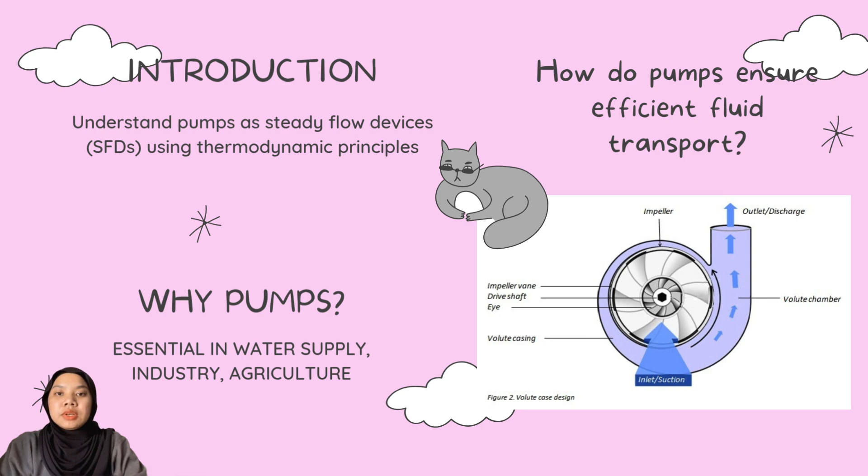Now that we have established the importance of steady flow devices, let us delve deeper into pumps as a vital example of these systems. Pumps operate on thermodynamic principles that enable them to move fluids efficiently, regardless of the conditions they encounter. Their construction is a testament to engineering ingenuity. At the core of their operation is the impeller, a rotating component that transfers energy to the fluid by increasing its velocity. The volute casing, which surrounds the impeller, is designed to guide the fluid effectively toward the pump's outlet

while minimizing energy loss. The drive shaft connects the impeller to the motor, ensuring a seamless transfer of mechanical energy into pressure energy. These components work in harmony to ensure that pumps maintain a steady flow even under varying operating conditions. This reliability makes pumps indispensable in many sectors.

For instance, in municipal water systems, pumps enable clean water to travel over long distances and elevations, reaching homes and businesses. In agriculture, they are critical for irrigation systems, ensuring that crops receive the water they need to thrive. Meanwhile, in industrial settings, pumps transport fluids such as chemicals, oils, and slurries, supporting the production of goods and materials.

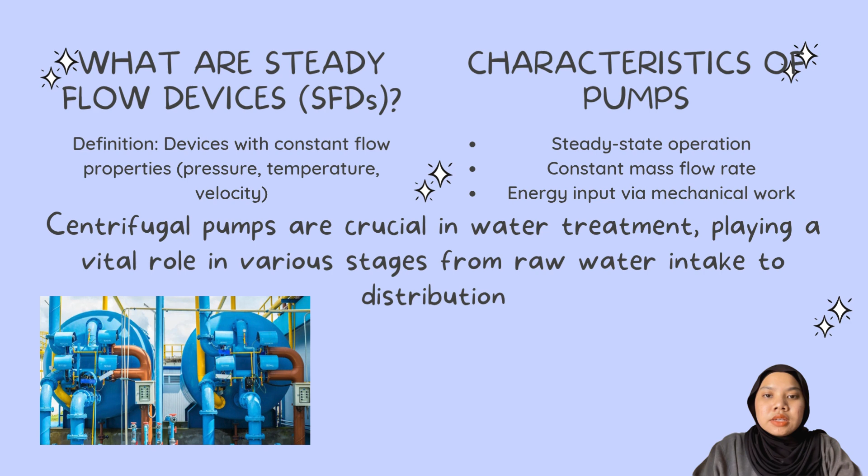Their ability to operate efficiently, adapt to different demands, and provide consistent results underpins their importance in modern infrastructure and industry. Pumps, as an example of a steady flow device, demonstrate how thermodynamic principles can be applied to solve real-world challenges, highlighting the intersection of science, engineering, and everyday life.

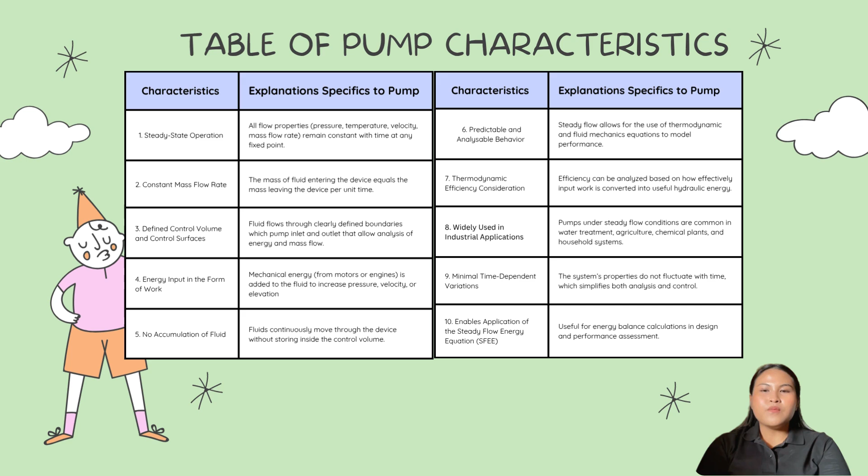Next is the application to pumps, in which mechanical work increases fluid pressure. The pump adds mechanical work to the fluid through the shaft. This increases the fluid pressure and sometimes velocity or height. For the steady flow assumption, the mass flow rate always stays constant and energy is transferred continuously. In steady state, all energy input, the shaft work, goes into changing the fluid's energy, mainly pressure head.

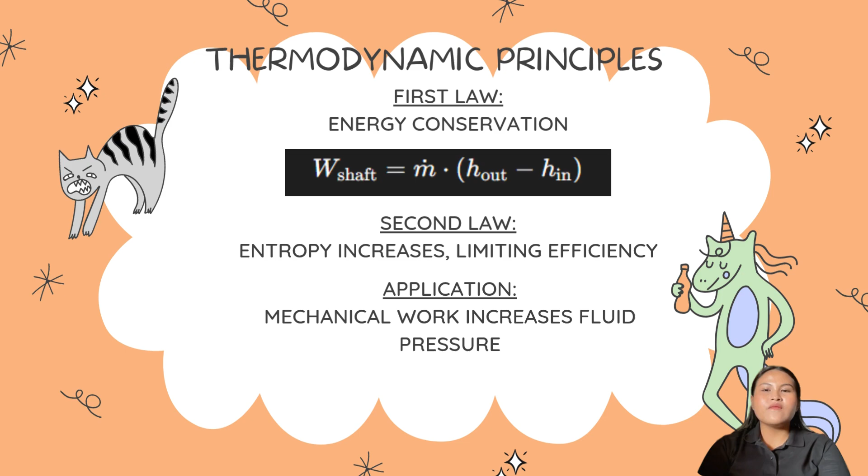So, this is the first law of thermodynamics, energy conservation. This equation is derived from the steady flow energy equation, SFEE. In pumps, shaft work is done on the fluid, increasing its enthalpy. The increase in enthalpy represents an increase in pressure or temperature of the fluid. In a pump, energy is added to the fluid to move it against the pressure. Second is the second law of thermodynamics, entropy consideration, in which entropy increases, limiting efficiency. This shows no real pump is perfectly efficient. Some energy is always lost due to friction, heat, or turbulence. The second law reminds us that perfect energy conversion is impossible. Hence, we calculate isentropic efficiency to evaluate performance. Entropy increase also indicates irreversibilities in the pump system. Next is the application to pumps, in which mechanical work increases fluid pressure. The pump adds mechanical work to the fluid through the shaft. This increases the fluid pressure and sometimes velocity or height. For the steady flow assumption, the mass flow rate always stays constant and energy is transferred continuously. In steady state, all energy input, the shaft work, goes into changing the fluid's energy, mainly pressure head.

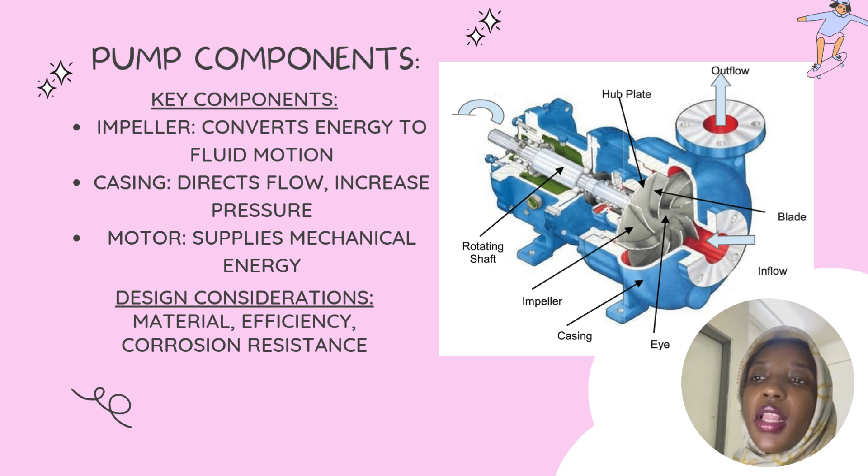About the design considerations for the pump, there are a lot of things we have to take into consideration, but again, most importantly are the material, the efficiency, and the corrosion resistance. So what do we mean by this? We mean that when we select any material to use in the process of design or manufacturing, we have to take into consideration that it should be a corrosion-resistant material and it has a high amount of efficiency.

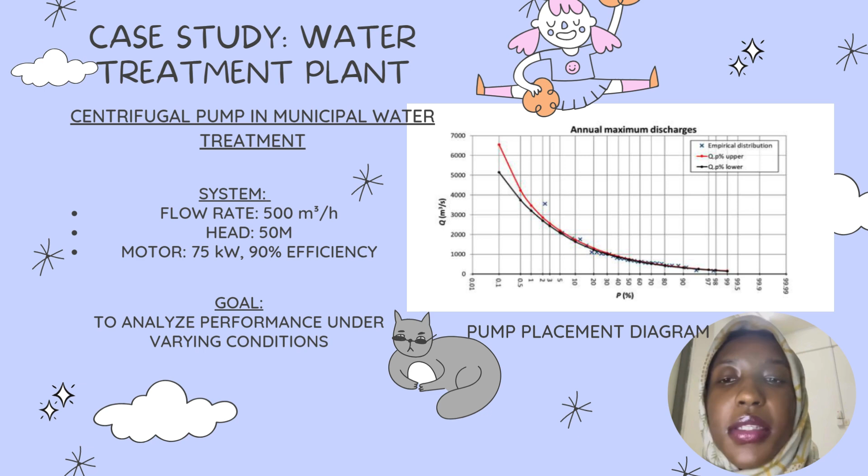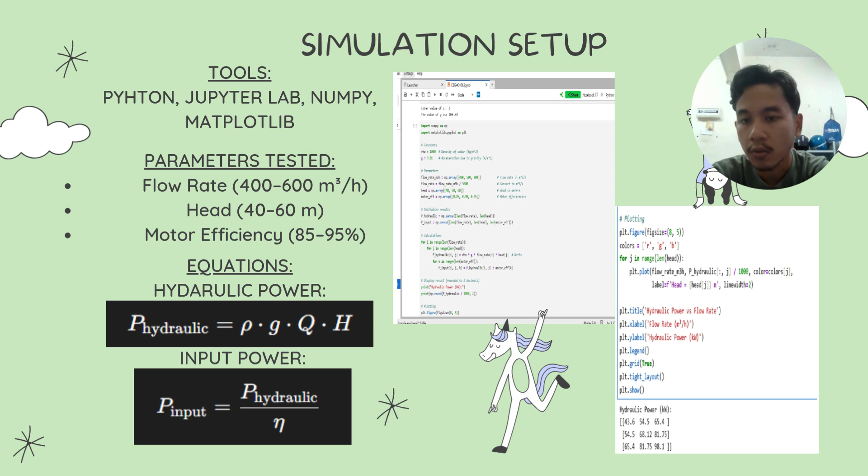So today I will explain to you about the simulation setup. For the simulation setup, there are a couple of software that we use: Python, JupyterLab, NumPy, and Matplotlib. That was the software we used to create our simulation setup. There are a couple of parameters tested in this simulation: flow rate, that is 400 to 600 meter cube per hour; head, 40 to 60 meter; and motor efficiency, 85 to 95%. There are two types of equations used in the simulation: hydraulic power and input power. I also put some reference pictures in the slide that you can see. That is the simulation that we test.

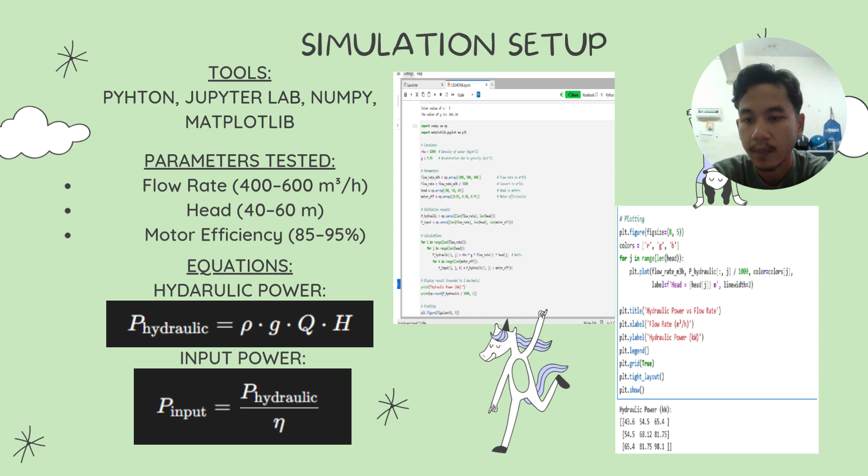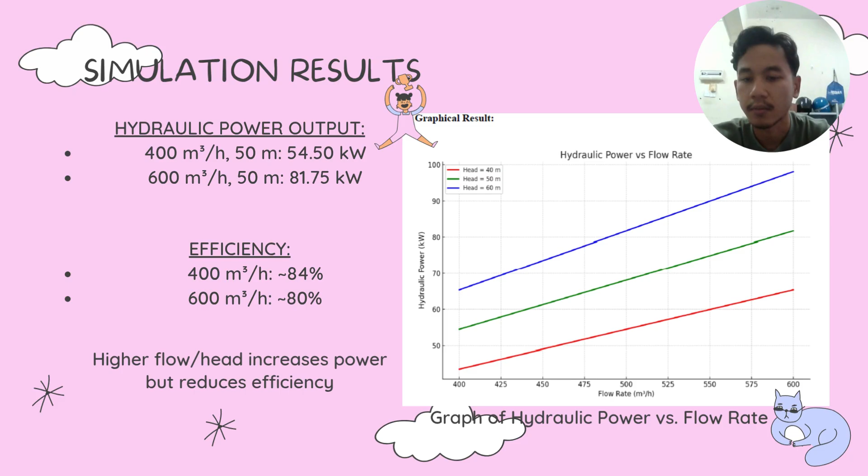Today I will discuss 4.0, discussion of results. Now I will present the discussion of our simulation results and how they relate to the performance of the centrifugal pump. Let's begin with the effect of flow rate on power and efficiency. From our simulation, we observe that increasing the flow rate leads to higher hydraulic power output.

For example, at a head of 50 meters, a flow rate of 400 cubic meters per hour produces about 54.50 kilowatts. At 600 cubic meters per hour, the output increases to 81.75 kilowatts. This is expected because hydraulic power is directly proportional to flow rate.

However, we also notice that as the flow rate increases beyond the pump's best efficiency point, or BEP, the system efficiency drops. So even though more water is being moved, it's done less efficiently, which can cause long-term damage to the pump due to turbulence or cavitation. In short, more flow equals more power, but not always the best efficiency.

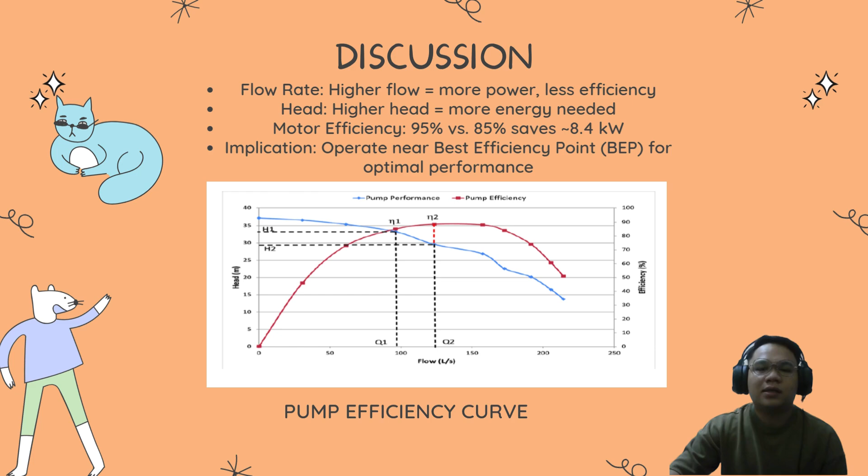Finally, let's discuss real-world application. Modern systems can use smart tools like variable frequency drives to automatically adjust flow and head based on demand. This helps keep the pump within its optimal range and saves energy. As students and future engineers, this project shows us how practical simulation tools like Python and Jupyter Lab can be used to model real systems. It helps us connect what we learn in theory, like the steady flow energy equation, to actual engineering application.

Now let's move on to the final part of our presentation, the conclusion. 5.1, summary of key findings and insights. In this project, our group focused on analyzing a centrifugal pump as a steady flow device, which we call SFD, using thermodynamic principles, especially the first law of thermodynamics. We applied this concept through a Python simulation using Jupyter Lab, which helped us observe how flow rate, head, and motor efficiency affect pump performance.

From our results, we found that higher flow rate and head lead to greater hydraulic power, but they also demand more energy and may reduce efficiency when operating beyond the best efficiency point. Motor efficiency plays a crucial role. Even a small increase can significantly reduce energy consumption. So this project didn't just help us learn equations, it helped us apply them to real engineering problems.

5.2, implications of the study for SFDs. What does this mean for steady flow devices in general? It shows that designing efficient systems depends on understanding how energy flows through them. In pumps and other SFDs like turbines or compressors, we must consider the balance between power, efficiency, and operating conditions. By applying thermodynamic knowledge, engineers can optimize systems for performance, energy saving, and sustainability, whether in industrial, architectural, or municipal settings. So this study gave us not just numbers, it gave us insight into real-world decision making as future engineers.